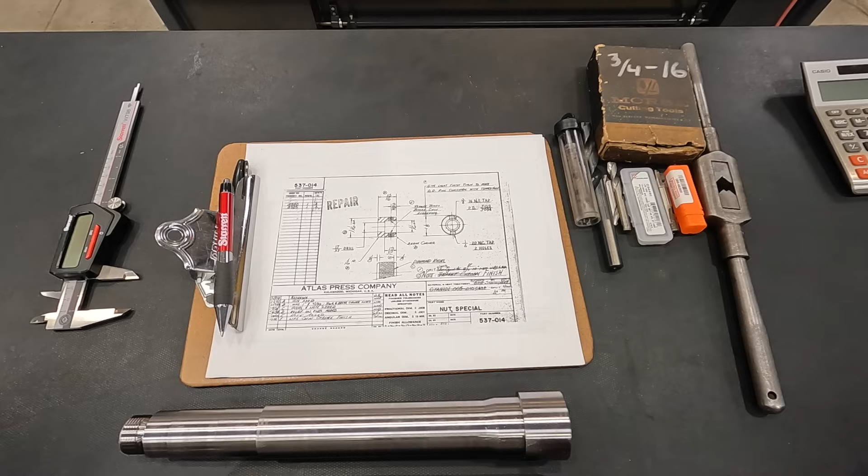A viewer of ours named Jason reached out to me and asked if this was a part that I would be willing to make for him. It goes to a vintage Clausing milling machine, number 8520. He had contacted Clausing about this part and they told him they no longer offer it, they don't make it anymore, but they did give him a copy of the drawing so he could make it himself. So that's what he sent to me.

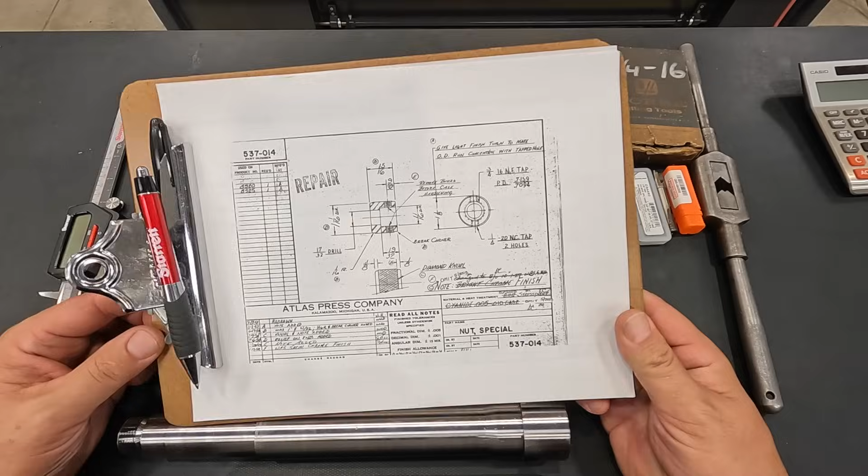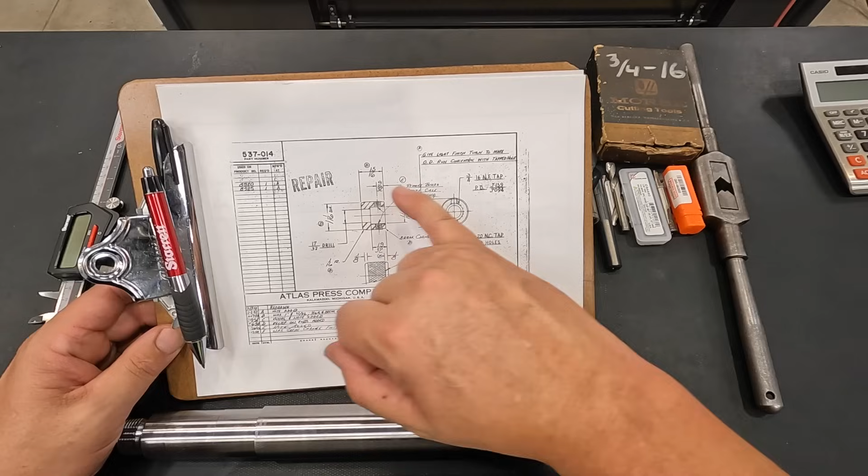This is the actual drawing right here from Clausing, and it looks like this particular drawing was redrawn in 1953. Pretty old part, and I love the hand draftsmanship that went into making these prints. It's just really great looking handwriting and everything. I learned how to do this kind of stuff in high school, so that's why I can do it some, but I certainly don't have the kind of handwriting and ability to write the numbers like you see in a lot of these old drawings. People just really had a knack and a skill for doing this stuff back before everyone used computers to make drawings.

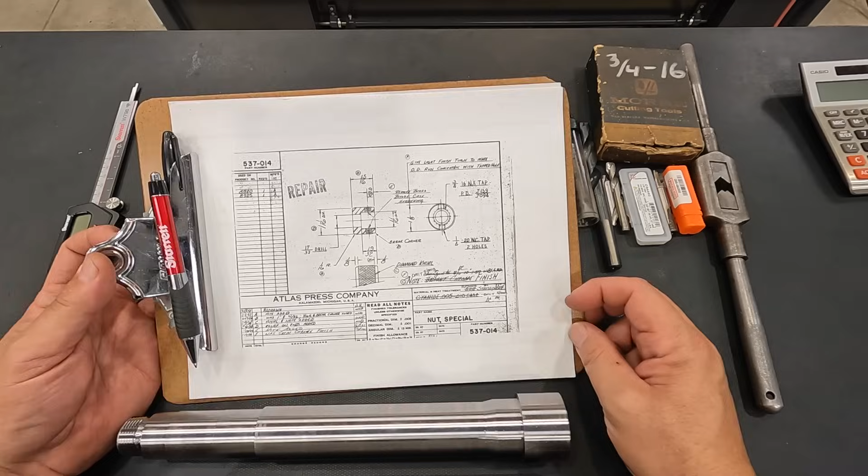But anyway, it's a knurled nut. It's got a 3/4 16 thread on the inside, a diamond knurl on the outside, and a couple holes drilled and tapped. Jason didn't actually send me any photos of where this goes or how it's used on the mill. All I have is this right here, so we're just going to duplicate what it says on the drawing and get this done for him.

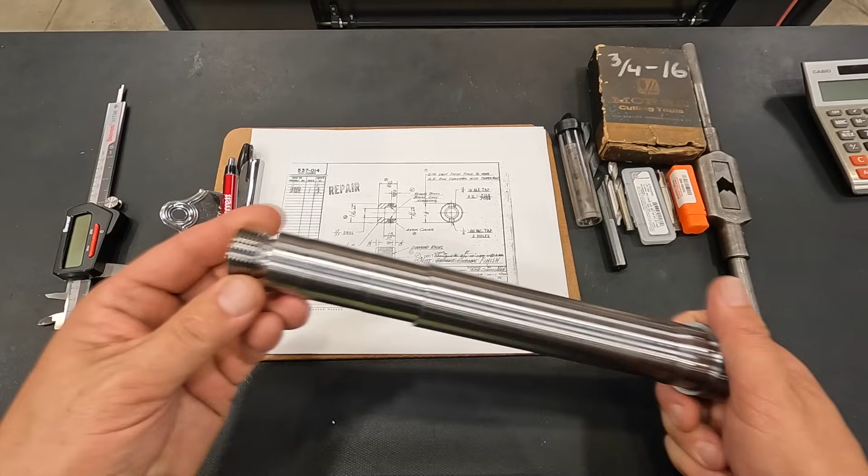I'm going to use this piece of 4140 right here. This is one of the shafts I had turned in the CNC lathe - one of the bad ones that was not on size. I had a messed up section on this undercut. I had several of these where I was trying to get things dialed in and didn't hit my mark. So we've got some extra material laying around that we can use to make other parts. We'll chuck it up and use this to turn Jason one of these diamond knurled nuts for his mill.

So let's go over to the Precision Matthews and get started on this guy.

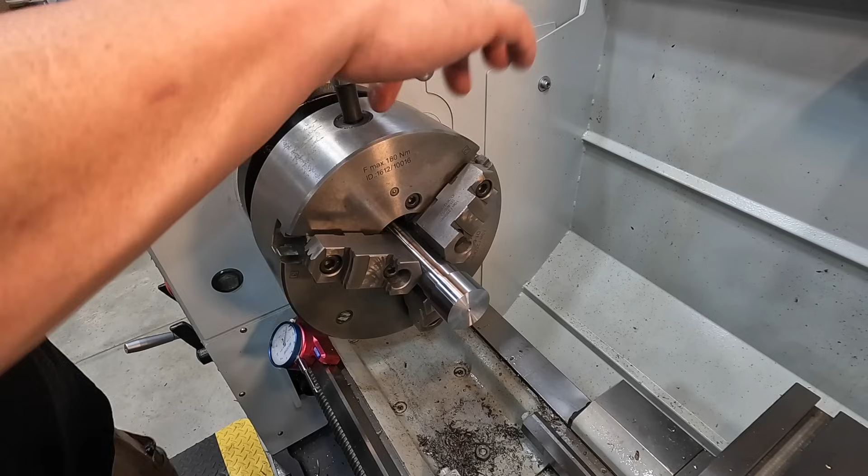As far as order of operations, I'm going to reface that, recenter it, and then we'll drill it, counterbore it. We'll use a 3/4 16 tap to tap it, and then we'll do the OD there. We'll have to turn the OD, turn a step on it, do the diamond knurl, and then once we get all those features done, we'll part it off and probably just chuck it back up to finish off the back side there.

There's just going to be a pilot hole to get a pilot down through there.

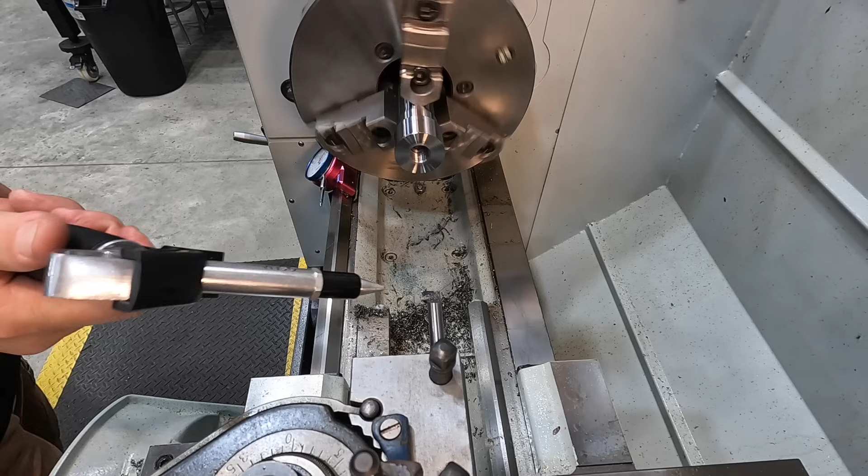Just decided to go ahead, since we had it set up true, to use our boring bar and our tools here to bore it concentric with our threaded features. It's a drilled hole, so I don't know how critical it actually is, but we've got it there on 17/32, so there's 531. I think that's going to be close enough for a drilled hole spec. We'll get our OD turned to 1 1/8.

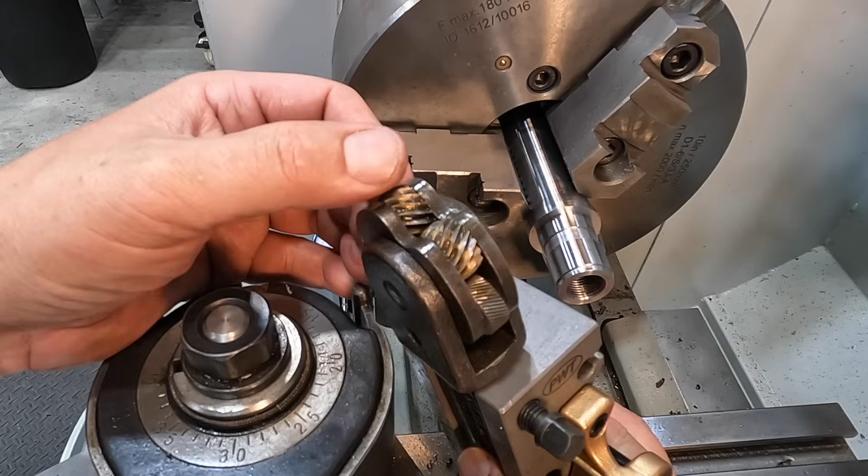All right, so this is the knurling tool that I'm going to use right here. This is my trusty go-to, always seems to get the job done, and I like using these diamond knurls. They're more coarse, but they seem to always work well every time. Usually when I want to knurl something, there's never really any kind of specs as to how coarse it is or anything, so I just make these work because they're set up ready to go and they get the job done.

So I've already got a zero there. Yep, zero. And we'll go for it here. We're going to run a slow RPM. That's 130, let me check. Yep, 130. We're going to feed 10 thousandths per rev, and we'll go in somewhere between 20 and 30 thousandths on the depth, probably.

I'm using the GoPro to give you this video because the other one would probably be shaking too bad for you to be able to see anything. And when I knurl, I usually don't disengage the feed. Yeah, that's looking nice. So I'm just using the on and off engagement there.

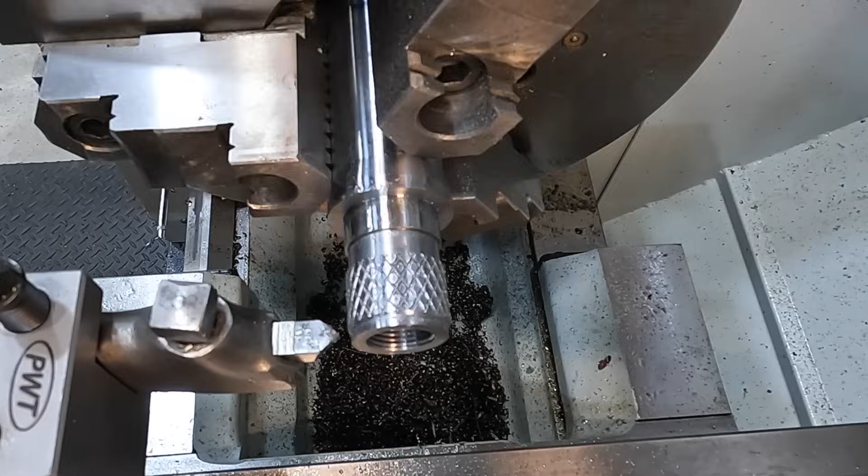Zero. Go into X0, it should line up again. All right, there's our chamfers there.

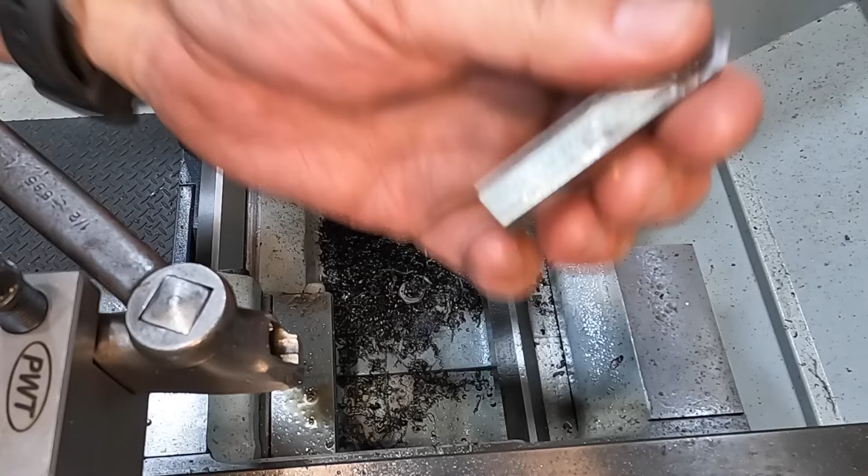I'm going to take this tool out, and I have a 1/16 corner rounding tool. This guy right there will give us the radius that we're looking for on the corner. It's got a 3/8 shank, that's what this holder holds down on, 3/8 shanks.

I'm just going to bring it up, eyeball the center. It looks pretty good. All right, we'll slow it down a couple notches.

That looks pretty good, right about there. All right.

I think what I should probably do from here, instead of parting it off, is hold it just like this, because we have to drill and tap through here for 1/4-20 set screws. We'll tap it for 1/4-20, I'm assuming set screws go in there. That way we can hold it, drill and tap it, and then come back to the lathe here and part it off. At that point, our last step will be to rechuck it again and face that back side off and put our chamfers on there.

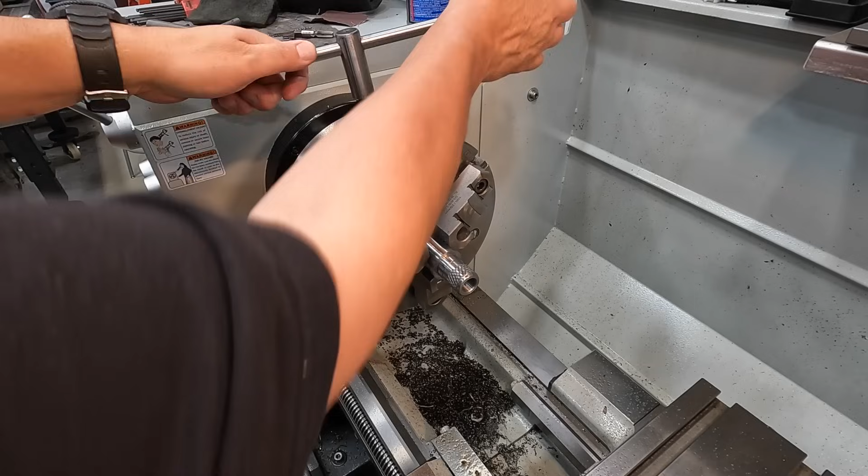We've got our dial set, or division anyway. I've got a little dot here that I use, the ball oiler and a paint dot, to indicate a 0 position. So I have it set on 180 right there. Drill and tap one side on 180, rotate it to 0, drill and tap the other side.

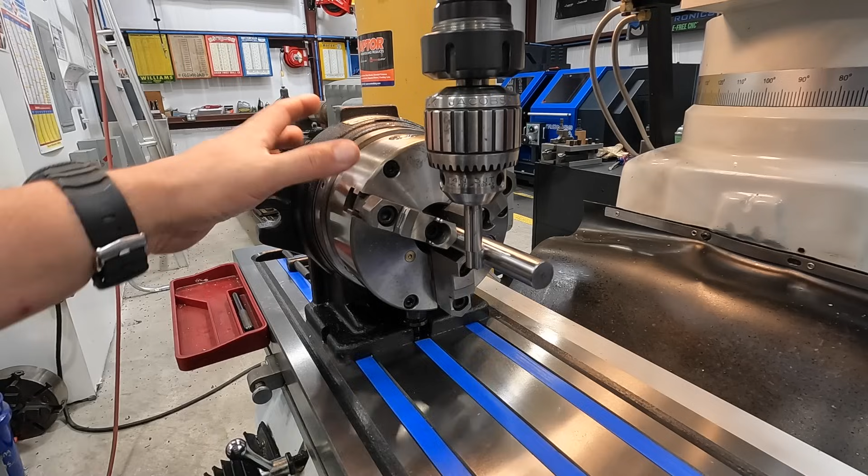We're about to come over here to the spacer to do those 2 tapped holes. I'm just showing you how I find the center. I've got this turned, ground, and polished piece of Thomson hardened rod that I use both as a handle to be able to pick it up and move it, and also to find the center of it as well.

Find one side, we're gonna zero out the DRO. Pretty standard procedure for using a DRO on a mill. And then find the back side, kick it over.

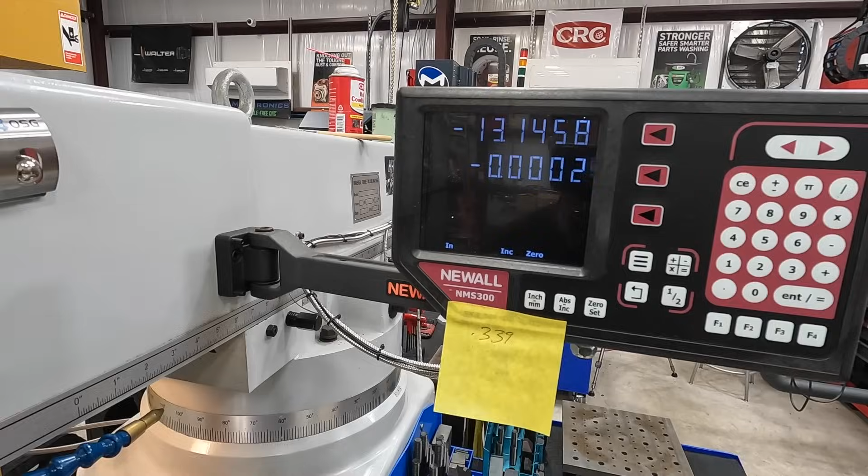And then this is the axis right here. We're gonna hit, where's it at? Half there, and then axis there, 643. So we move our y-axis over until we get that on 0. And that's gonna be the center of the chuck there.

So now we need to find the center line of where our drilled and tapped hole is gonna be in relation to the face here. That is gonna be 9/32 of an inch, or what is 9/32? 0.281. So we'll use this edge finder here.

We'll find the edge. All right, we're gonna zero, and we're gonna move how far? 381 thousandths. There we go. The extra 100 thousandths is half of the diameter of the tip of this edge finder. This is a 200 thousandths diameter edge finder.

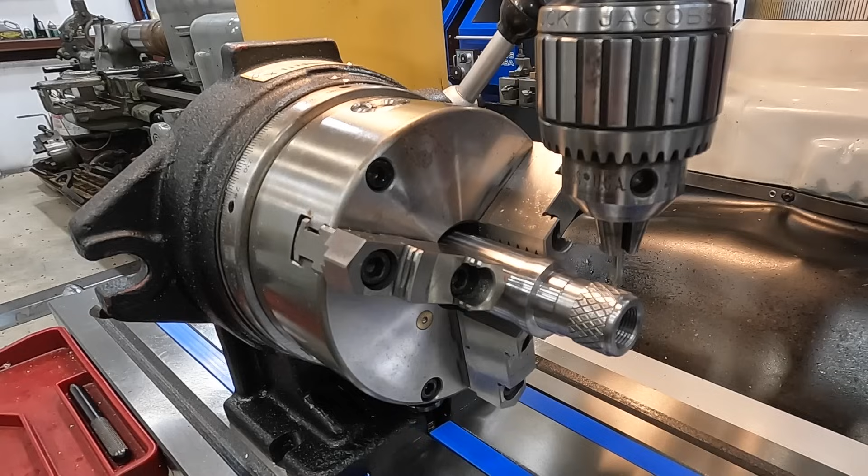A quick visual reference with our Starrett rule indicates that we are on 9/32 from the face there. So I think I'm going to do this in stages where we'll do the center drill to center it, put the drill in, drill it, and then tap it. We'll drill it, rotate it, drill it, rotate it, and just keep going that route. All right, so let's get moving.

It looked like it moved on me. Let me just make sure. No, it's tight, okay. Just looked like it had moved, maybe not. Just a little dab of cutting oil there. Come on, there we go.

Zero. Now we'll get our tap drill in there. It should be a number 7 drill bit. Number 7 drill bit, that's tap size for a 1/4-20.

Drop the table down a little bit. Another dab of cutting oil, just using my dark cutting oil for this. Get the handle in a comfortable position.

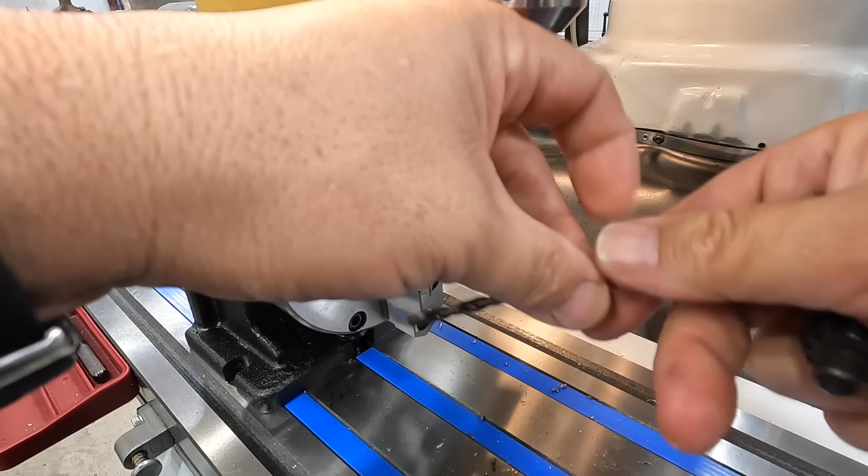I think what I'm going to do is, since we got that knurl surface on there, go ahead and chamfer that very lightly, just to help that tap follow through there. All right, we're just going to use a 90 degree chamfer here.

Okay, that looks pretty good. Zero. That looks good too. All right, we'll find us a tap and tap it.

All right, we're going to use a 1/4-20 gun tap here. This is a Cleveland brand. Just put it in the chuck and we'll power tap it.

Rotate it around back to our 180. Maybe we'll tighten up the shot, get you a little closer for this one.

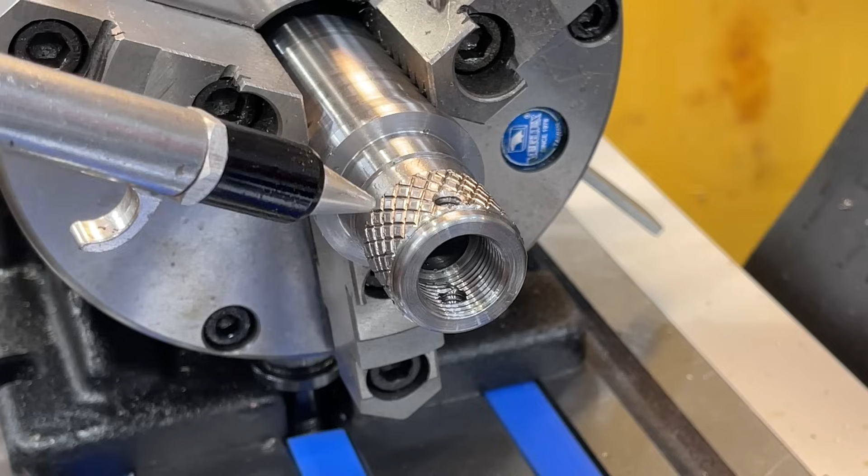All right, we're done with the milling. We'll go back to the lathe to finish this guy out.

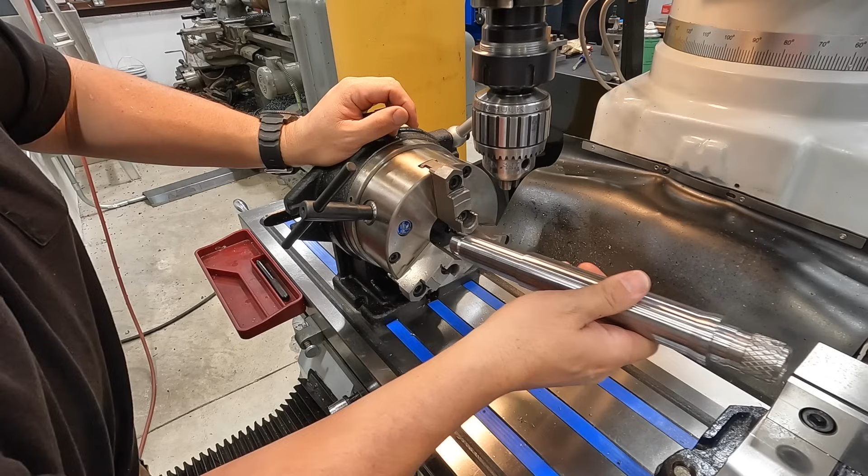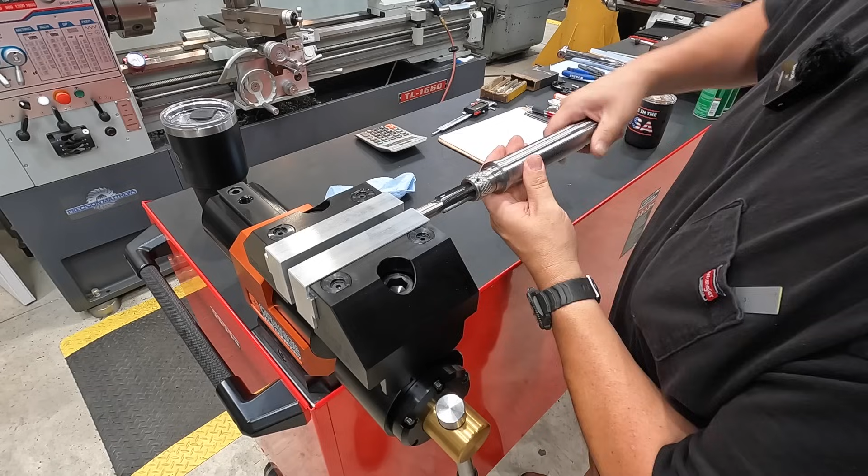I just want to make sure that the tapped holes are deburred good, so I'm going to use the bottom tap. Clamp it in the vise here and just chase the holes with the tap. All right, that should be good to go.

Okay, let's get this parted off. I'm going to use the PWT parting tool here, it's a carbide insert, and I've just touched the face there. Probably take 1 or 2 thou. I'm going to let that tool come across and just trim that face, just like that.

Tell you what, I'm going to do that again, and I'll back off of it. I'm going to zero out the readout right there. Clean that up one more time. We're at 0. All right.

Now I'm going to move it in Z negative 1.072 inches. 1.072 right there. So what that's allowing us is our 15/16 width plus the width of the parting blade, since we touched off on the left side, and that's going to give us 10 thousandths to be able to face that back side.

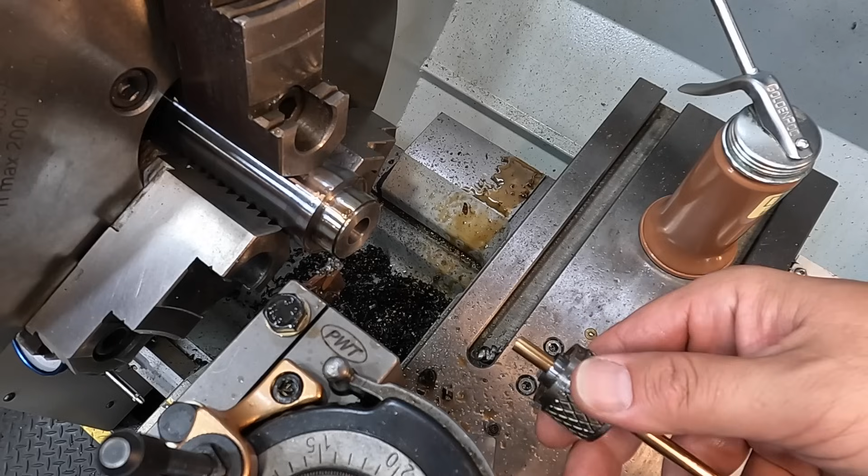There we go. Yep, it's usually warm when you part it off.

All right, so we'll just chuck this right back in there. We should be good on the knurl there, and then we'll go ahead and face this side, put our chamfer, our radius, and then that'll finish this up.

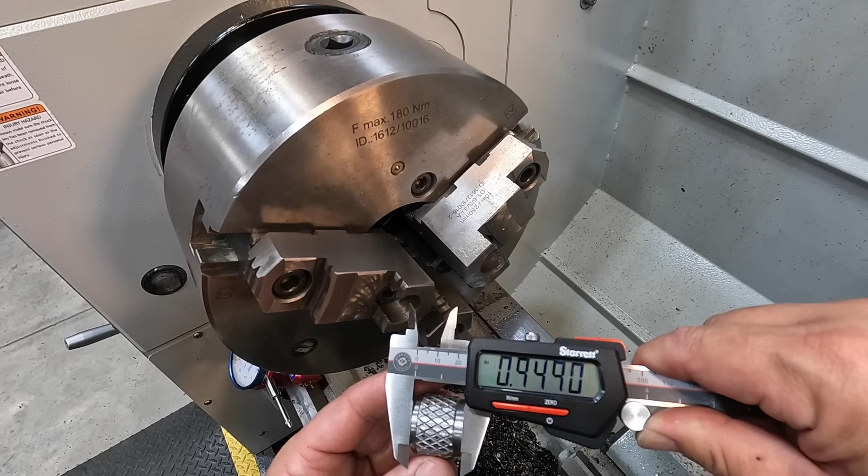All right, so let's measure our parted width there. 949, so 12 thousandths over. Okay, what we'll do is just touch it, take 10 thousandths off of it, and let's see if we can get it to run true on our knurl.

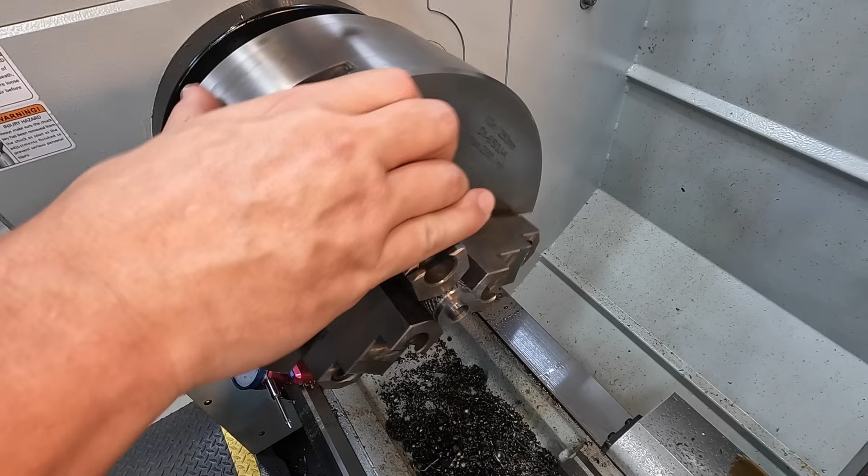Try not to over squeeze it here. Let's see how we look. All right, visually it looks like it's running true as can be.

Get our face done first. All right, so I would call that a touch. Let's move in 10 thou.

Going back with our corner rounding tool. I'm just going to pick this up by hand and kind of lock it in on center line. We are clearing the chuck jaws.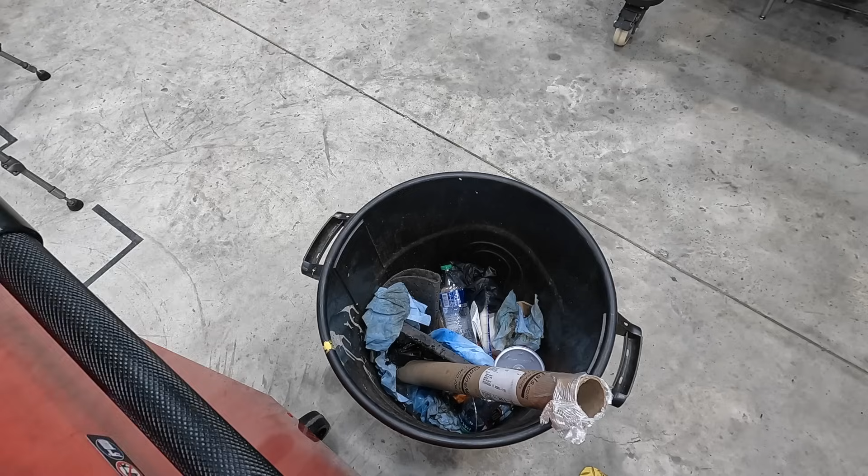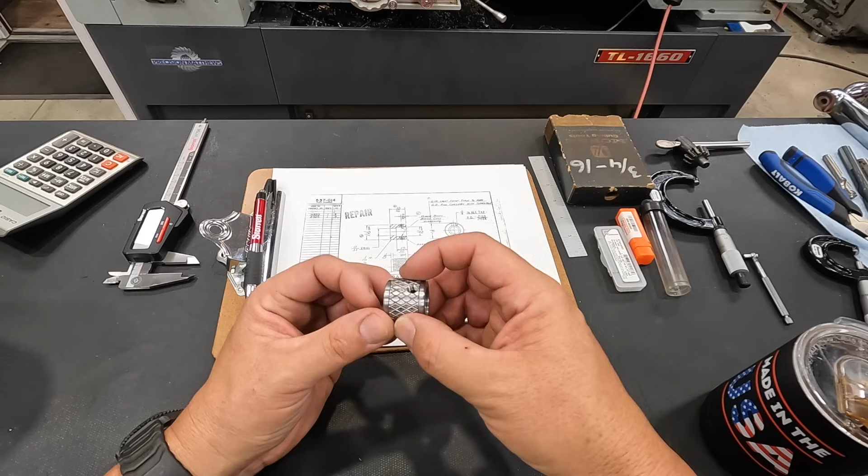All right guys, well this is finished up there. We've got a completed special nut for our Clausing 8520 milling machine. I like the way the knurl turned out. I like the more coarse diamond knurl myself, even though the print shows a little bit finer knurl, but I really don't think that matters there.

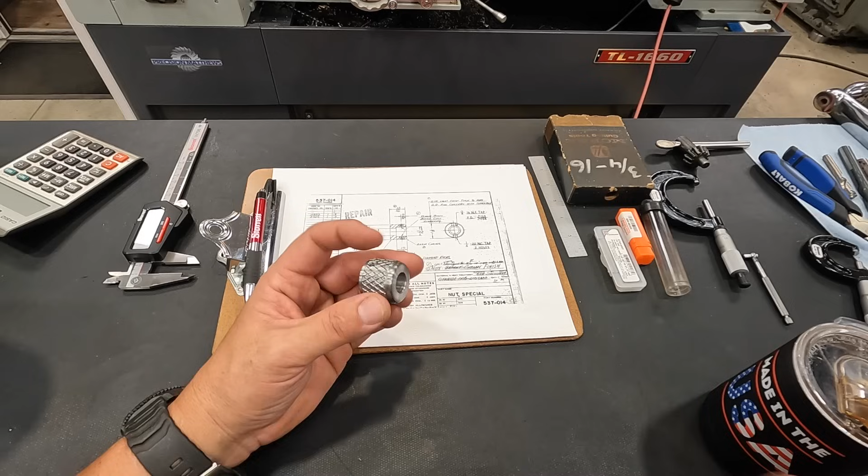I think that this is going to be just fine visually, and of course you get the grip on there from the knurl so you can grab it and twist it with your hands. I wish I knew exactly how it was used or what it was for on the mill, but unfortunately I just don't have that information at the time of making this video. I'm sure some of you guys probably recognize it though and know what it's for and what it's used for.

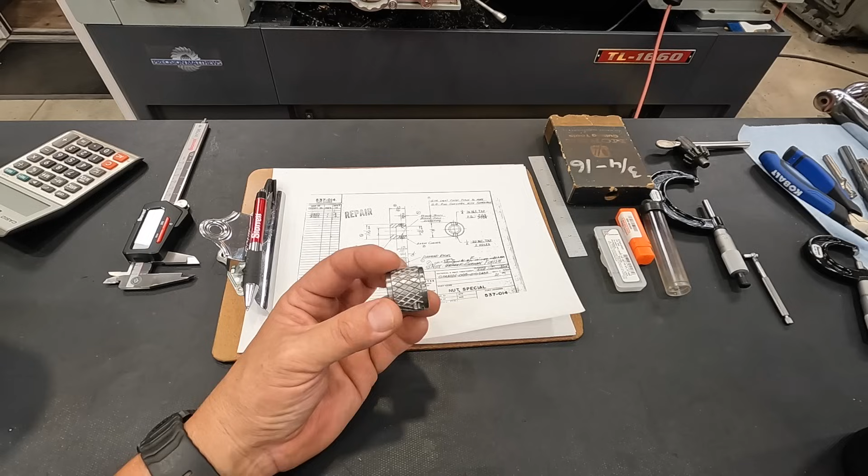But I had fun sharing, making this for you, showing the little simple techniques using a manual lathe, the manual mill, and what it takes to knock out a little part like this. So that's it, we'll get this wrapped up, get it in a box, and get it sent to Jason so he can carry on with his mill project there.